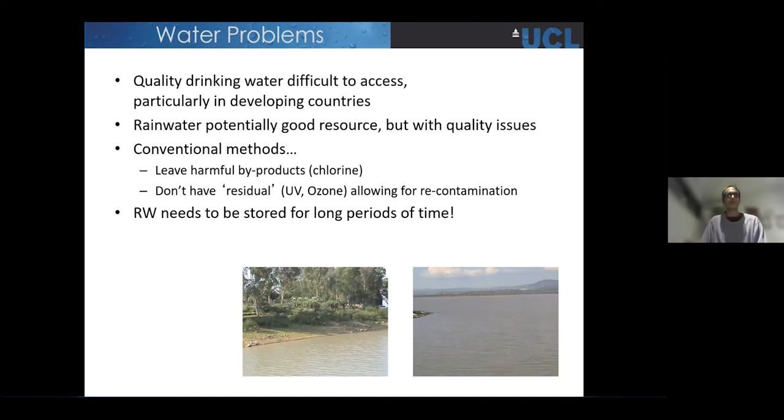and the issues around storage, which are quite critical because in many parts of the world, you only have rain 3-4 months a year, like some of the areas I worked in Mexico. And you need to be able to store that for the other 8 months. And that sounds easier said than done. How are you going to conserve it? Are those tanks going to be contaminated? How do you do it in a very cost-effective way to store all these huge amounts of water? So these are some of the problems and the challenges.

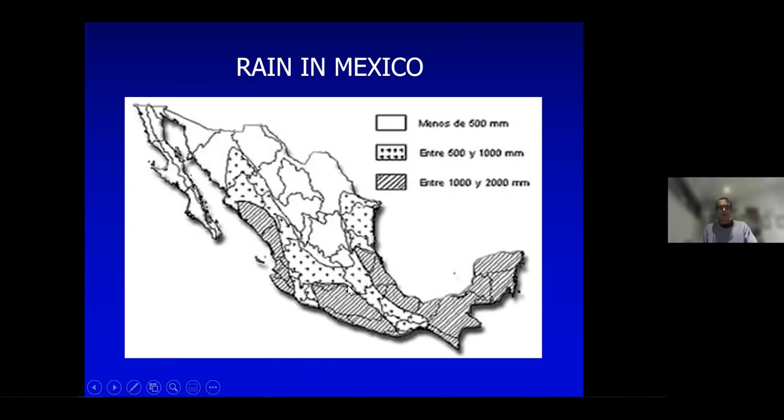So the inequalities in Mexico are not just economic, which are well known. It's a country with one of the highest economic inequalities in the world, probably, in terms of the gap between rich and poor, but they're also present in water. So we have very water poor areas and very water rich. And that's quite interesting because any project you do has to be completely different based on where you are. So I started all this in Mexico City, which is in between the temperate and the rainy zone.

Something that a lot of people don't know is that Mexico City, even though we associate it with a relatively dry place, actually receives more rain than London, for example, which shocks all my students here at the university, because we tend to think if you're in England, it rains all the time. But it's one thing raining all the time and another is to have storms. And so in Mexico, it's only a few months a year, but it's highly, highly concentrated. And in those few months, you'll probably get more rain than what we get year round with this sort of drizzle that's quite annoying that you get throughout most of the United Kingdom.

So let me share here some interesting slides. Mexico is a city that can be extremely dry. It's very, very water stressed. In fact, I won't go into it today, but I do have a paper. I'll share the publication link later about how water actually gets to Mexico City.

And that is actually an incredible feat of engineering. It travels 200, 300 kilometers away. It rises over 1,000 meters. So it goes all over from the lowlands all the way to this very, very high volcanic city. And then it supplies to the 20 to 30 million people who actually live here.

So we have to pay a very huge price to get water in, energy price, the cost of actually extracting the water from other regions and other states and so on. And yet, however, you can see this neighborhood, a nice, easy to pronounce name for all of you, Ixtapalapa in Mexico City. You can see when it rains, you can easily get floods, people actually moving around on boats.

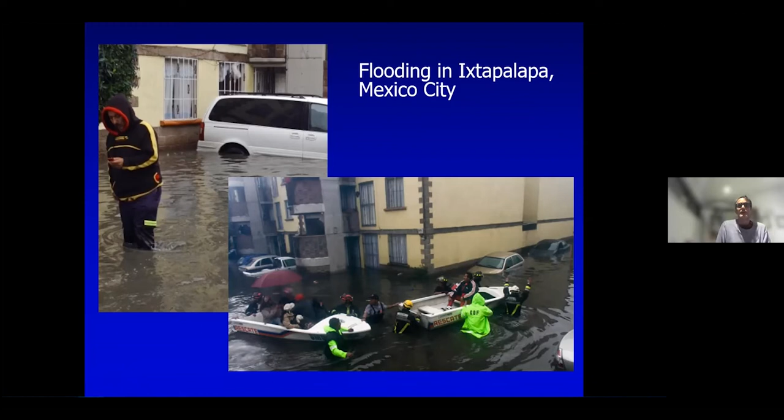They actually pay a lot more money per liter of water than what the wealthy people pay, who have tap water and they just get a meter and a bill. The people here will have to pay tons for a truck reaching them. So, of course, when I was working in Mexico City, I thought, well, this is a big disparity. I mean, if you think of the average consumption per capita, some parts of the world consume a lot more than others. USA, these statistics change.

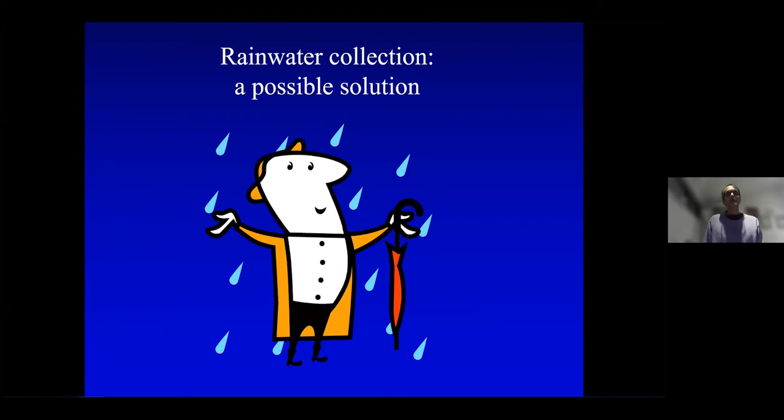So, of course, if we put 2 and 2 together, which is what I started doing with our NGO there, and it sounded obvious, but it actually wasn't that commonly done in the city, you can say, well, you have lots of water, and then you have a drought. So we could actually bring 2 and 2 together and actually start collecting some of that water. And that's how all my journey started, it was around 2002, 2003 with the first systems.

But the first thing to note is that we are not in any way original. We didn't reinvent the wheel just because our group decided to collect rainwater. It has been done in the Negev Desert, Petra, fantastic place in Jordan, which is actually in the desert. And they only have about 300 millimeters of rain a year in very concentrated bursts. But the Nabateans, I think it was, a culture who built Petra, they did these settling tanks and channels to actually bring all this water with stone chambers, actually very beautiful ways of storing.

The Romans did rainwater harvesting. The Mayas in Mexico had underground rock storage. In India, it was a very old practice as well. But sadly, in the 19th century, with the advent of hydraulic engineering, pumps, et cetera, a lot of that was actually forgotten because the trend was more to have big hydraulic works, big piping, big pumps, and so on, and kind of move away from this local, decentralized approach.

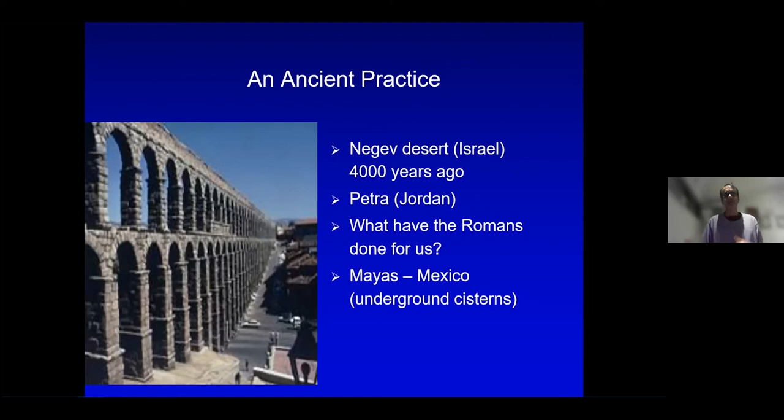So it is common to see lots of these cisterns abandoned. And in India, they had the famous tankas, which have only started to be revived by NGOs relatively recently, but a lot of them were actually neglected for many years. So we were thinking, well, this is an ancient practice. Can we bring it more into the modern world?

We see an example here from the 1920s, 30s. Some of you have been to the Park Güell in Barcelona, built by Antonio Gaudí, fantastic architect, of course. And this park was already very futuristic. All these columns in the classic Gaudí warped shape would actually have pipes inside, some of them were hollow, to bring the water and collect it in massive cisterns underneath the park, which was then used in the dry season to keep the whole park irrigated. It's still used. So an incredible example of how you can make rainwater beautiful and aesthetic as well.

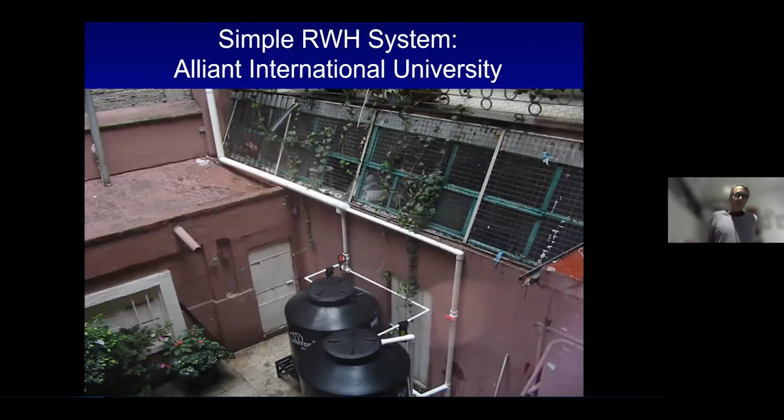So the first project I began was in the university where I was working, which was an American university with a campus in Mexico City. It was called Alliant International University. And basically, it was a very old building from the very early 20th century. Those of you from Mexico or who know the area, it's an era known as the Porfiriato, from a president called Porfirio Díaz, who was very inspired by French architecture. So lots of neighborhoods were built in the old French style, including this university.

The problem with the French style and with buildings in the early 20th century is there was no criteria about collecting rainwater. This was not on the agenda. So the sewage pipes running from toilets, etc., mix with the rain pipes. And that's very, very common. If you go to old buildings, everything is kind of mixed.

So we had to actually rescue, in a very old historically listed building, the rainwater pipes. So we had to go as high as we could, break the wall, try to see where the toilets and the kitchens or the sinks were connected to this big drainage pipe, and just rescue the rain that came from the roof, and then put in purification systems and so on. So that was our first system. It was quite a challenge.

We had lots of problems, but we learned a lot, and it was extensively covered by the media and the press, including Reuters. BBC did a program on it in 2004, which really impressed me a lot, because I thought this is the most silly, obvious thing in the world. We're just putting two tanks to bring the water from the roof down. But you would be surprised at how much resistance there was to it, how few people would do it.

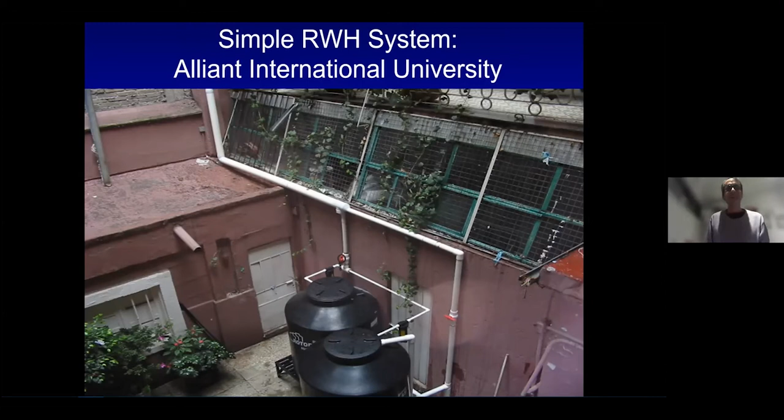And the excuses were all sorts of things, from water in Mexico City is contaminated because the air is polluted, rainwater is dirty, rainwater is wastewater. You don't drink that, you don't want to go near that. Because of course, when it rains, people see the streets flooding, which happens a lot in Mexico City, mixing with the sewage, and they just associate rain with very dirty water. The urban association is not this sort of fresh spring, it's a completely different perception, or it was. It's gradually changing, as we'll see.

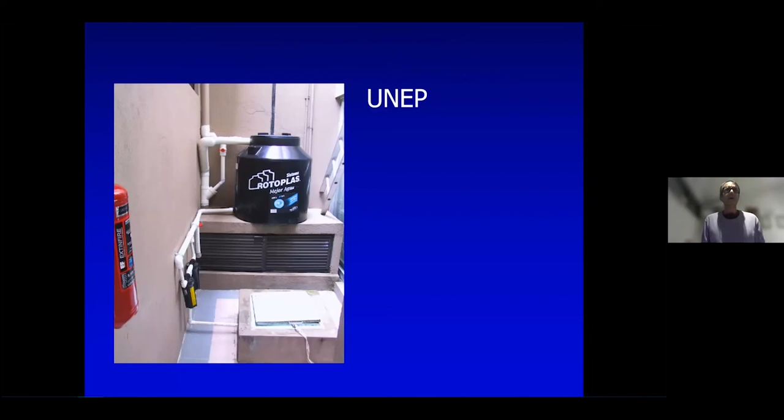So the success of this led us to build a new system in the United Nations Environment Programme, where I worked as an advisor and consultant for two years, managing water programs across the Caribbean and Latin America. The headquarters used to be in Mexico. So we did a nice system, and what you see there is actually a sand filter. So I started experimenting with old techniques like biosand filters.

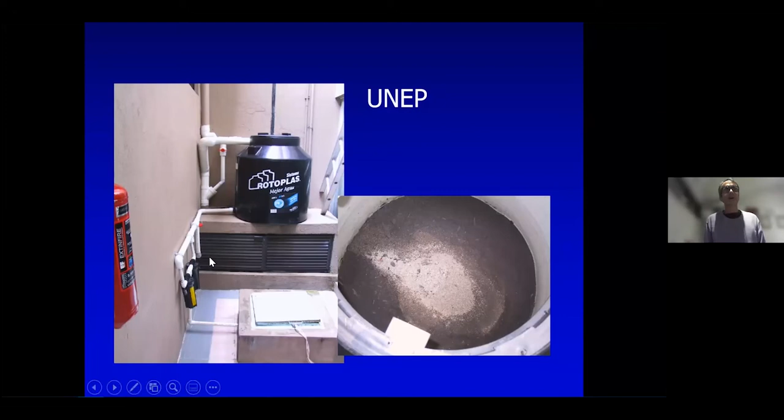Again, nothing new. We're just trying to combine different options. And we were using systems that already existed. Again, in old buildings it's very hard to build new things. So they already had a water cistern. Mexico City suffers from water shortage, so it's common that people will have a cistern anyway. So we just started learning how to purify, filter water, clean it up, and then mix it with rain.

That led me to do a massive project, in 2004, 2005 as well, with the Ministry of the Environment. That's their headquarters. In Spanish, it's called Semarnat. This was 500,000 liters a year. A big engineering challenge to do this. It's a building that has thousands of people working there. It's the Ministry of the Environment. So we used all the elevated roofs we possibly could.

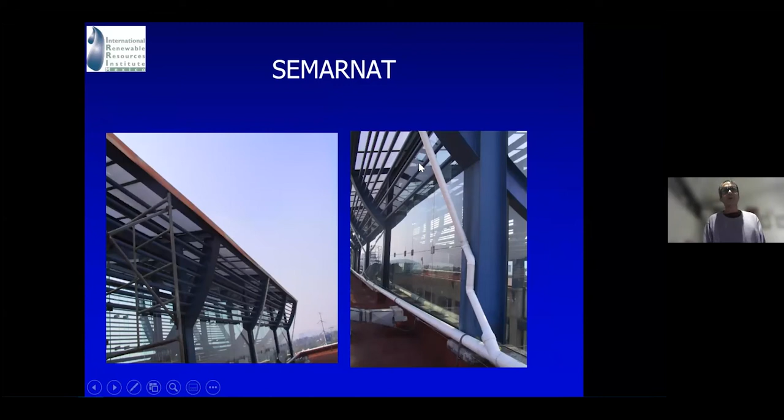And then an interesting design here was to combine with the existing cistern. Again, they had capacity for also about over 500,000 liters. So what we did is purify the water, state-of-the-art purification, UV, big retro washable carbon filters, particle, everything I could possibly imagine in the book of filtration. I threw it in there because this was a Ministry of the Environment, so they were obviously very concerned with the quality of the water.

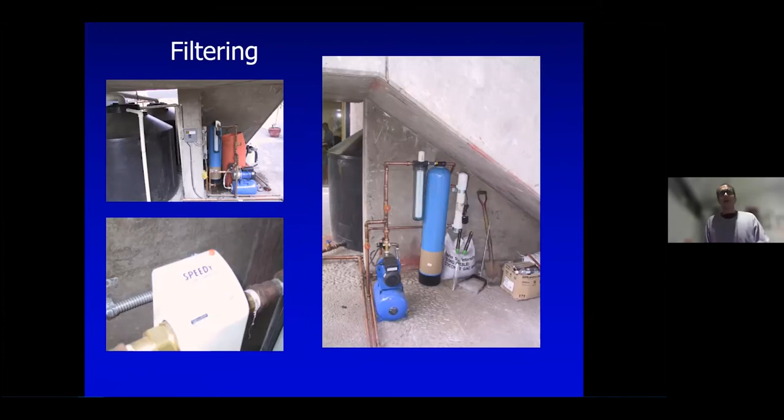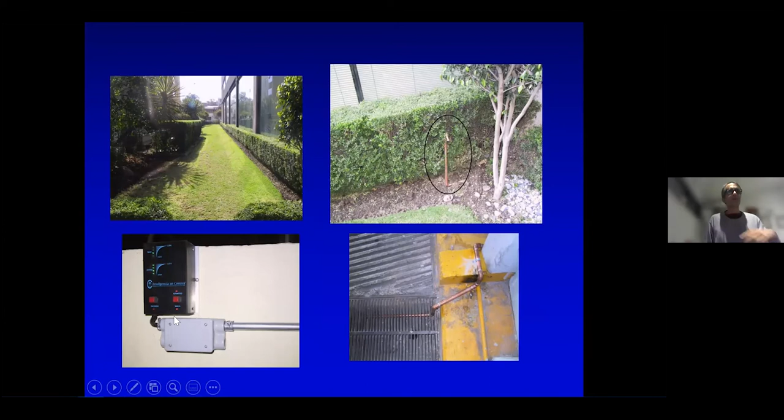And this clean water, we would then feed it into their cisterns right here. The not so clean water, because we could separate it, so the unfiltered, we use it for their gardens. They still have extensive areas. So I set up a couple of taps of just crude, unpurified rainwater. And then we had some electronic controls to know what was going in what direction, how full was each cistern, and so on. That's been a successful design.

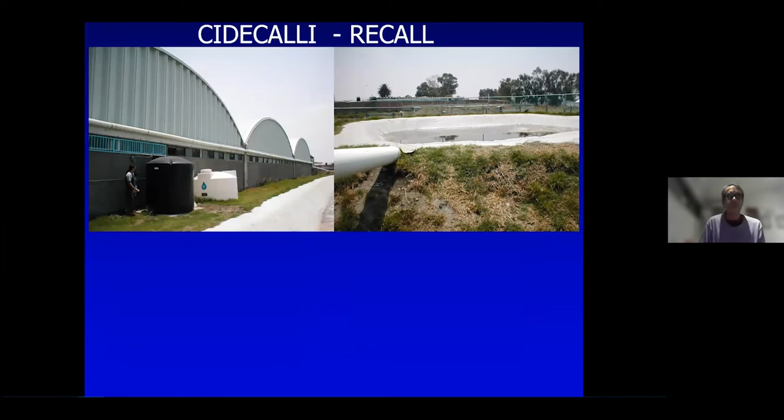This is not one of my projects, it was one that I joined up. It was a university in the outskirts of Mexico City, the postgraduate school. They had this idea of doing very, very large 1.5 million liter cisterns here with a plastic geomembrane, a brilliant way, which I then adapted to many of my future projects.

And then with them, we created something that was called, in Spanish, the acronym is the Network for Rainwater Harvesting. It doesn't really exist in that form or shape today. It's sort of evolved into different things, but it was a successful group. We had NGOs, we had the United Nations Environment Program, we had a couple of universities, suppliers, and it was a nice thing.

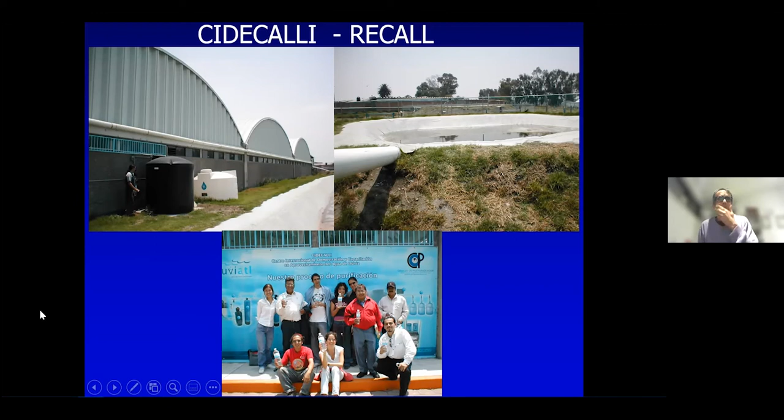So this particular group, they did a wonderful project, purify the rainwater. In this case, they used even more purification, reverse osmosis, you name it, and they bottled the rainwater and then sold it to compete with Coca-Cola, who still has a big monopoly over bottled water in many parts of the world, including Mexico. I wouldn't say exclusive monopoly, but I think they take over a huge portion of the market. So this was a cheaper water.

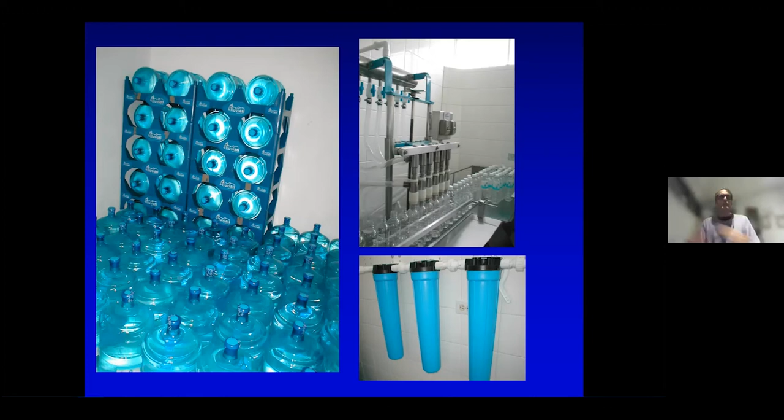It's very soft because rainwater, when you purify it, drinking it is lovely because it doesn't have as many minerals. So it's what you call soft water. Some of you will know the difference between hard, which is very mineralized water, lots of calcium, magnesium, and soft water. So this is very soft water. And then I started doing systems in homes as well. And people who shower with purified rainwater, they cannot go back to the other water because it's excellent for your hair. It doesn't clog the sinks and taps with lime because it's very soft water. So that has many advantages.

So here, again, I learned a lot from this postgraduate school that I showed you. The idea was you can actually build a cistern with this plastic membrane, which is quite cheap. Just compact the ground and dig a hole. And then on top, you can put a concrete layer or beam and tiles. There's a few techniques that we can do to just create a slab and cover this. But instead of having a whole bunch of concrete underneath, which is really expensive, it's like building a room underground, we just do this membrane.

So after that, I went on to do not just NGO work, because I had to make a living, right? So I started doing commercial projects. I did high-rise buildings with big developers. I did the system in the Walmart headquarters, you have to work with them all, don't you? Which was the main headquarters for Mexico. I don't know if they also control some other areas of Latin America. So their entire new headquarters, I did the full rainwater harvesting system and also advised them on other water saving. They were very keen to get the LEED certification, which is a sustainable building certificate.

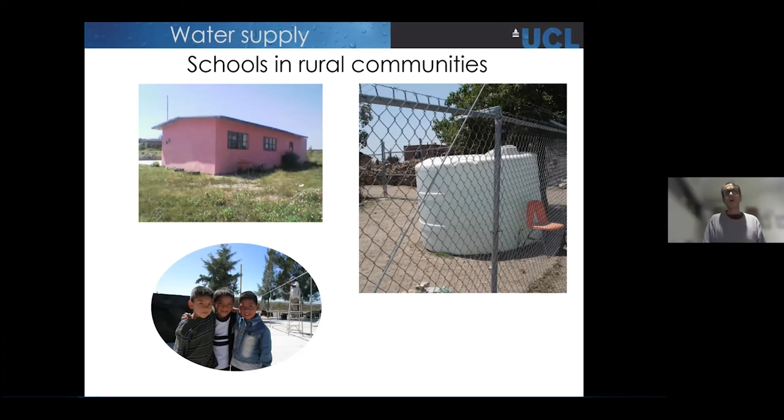So I was hired by the municipality, and we noticed that lots of the schools just did not have any potable water. There had to be a truck delivering water. And what they did have was some wells which are extremely contaminated. So we could see fluoride contamination. We could see arsenic in some of the wells, E. coli. The kids displayed an early disease called dental fluorosis, which happens when you drink water with too much fluoride from the wells, which then becomes a crippling disease for the bones.

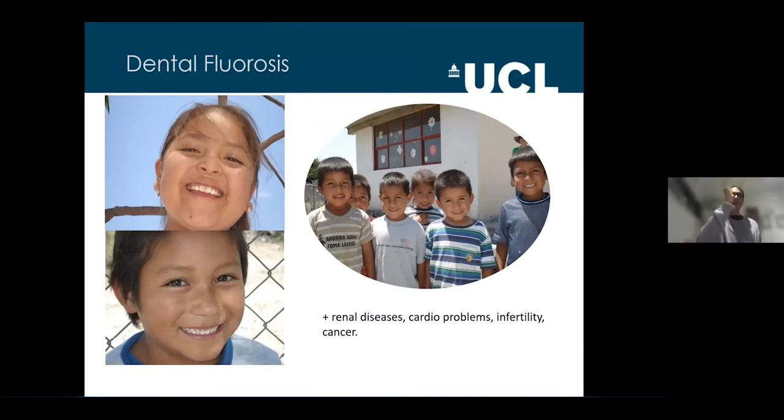They hired me to kind of tackle this problem. And they said, well, let's just collect rain and then purify rain and leave that well water for other uses, toilet flushing and maybe even hand washing, etc. And let's use clean rainwater for drinking. So the other way around of what most people think. And we started developing this sort of model for rural rainwater harvesting systems.

This is based on an NGO that kind of spun out from RECALL, from our first group that I mentioned. Very successful. You can look it up online, Isla Urbana. The director is actually a cousin of mine. It's all in the family.

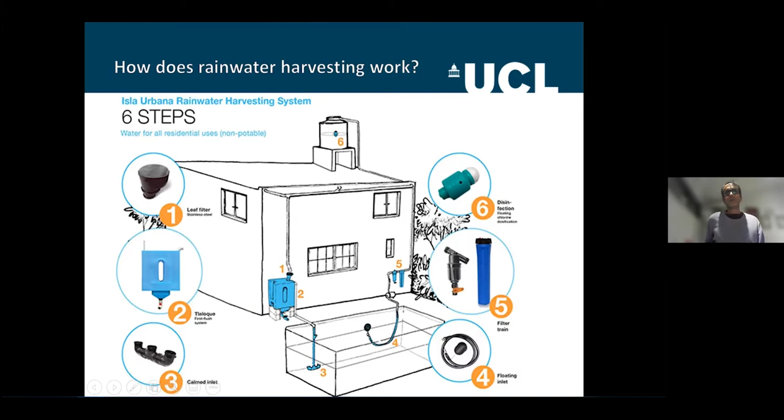So it's a very nice graph. You can see here all the elements that you would need to have in a rainwater system. So you have obviously the gutters. I'll show you some pictures. There's a first flush to get rid of the first impurities of the rain. Then you have your cisterns, purification, and so on. And this will change depending on what you want to do. And then I'll just show you some examples.

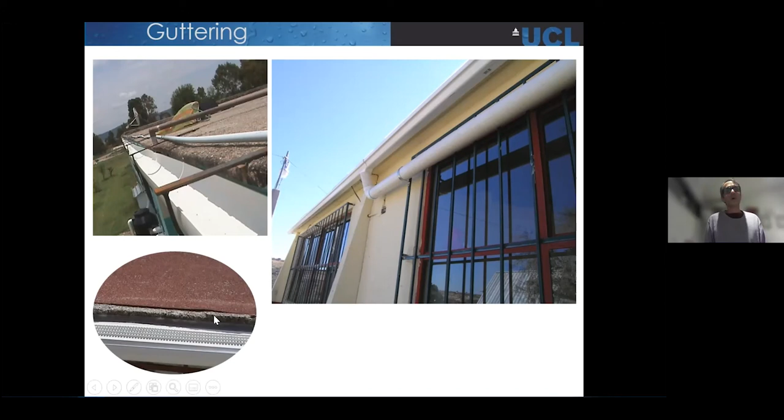So you can actually do very cheap guttering with just PVC pipes cut in half, or you can buy more sophisticated guttering like this with meshes for filters. The first projects I didn't put that mesh, and then we had a bird's nest here on the gutter, unbelievable. And it was just flushing down the whole thing and clogging everything. Or rocks, or all sorts of things. So it's important to take care of roofs when you're going to do this. Look into the uses people give. In Mexico, some people hang clothes on the roofs or live there. So you have to consider all of these things.

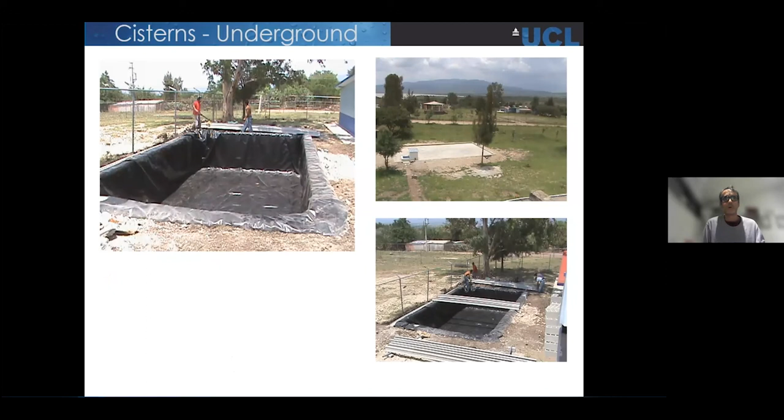We developed this technique that I mentioned about doing compacted square boxes with membrane, and then putting this technique, which is local in rural Mexico, beam and tiles. And then you could do what I'm showing you on the top right corner. So I did loads of schools and clinics with this technique.

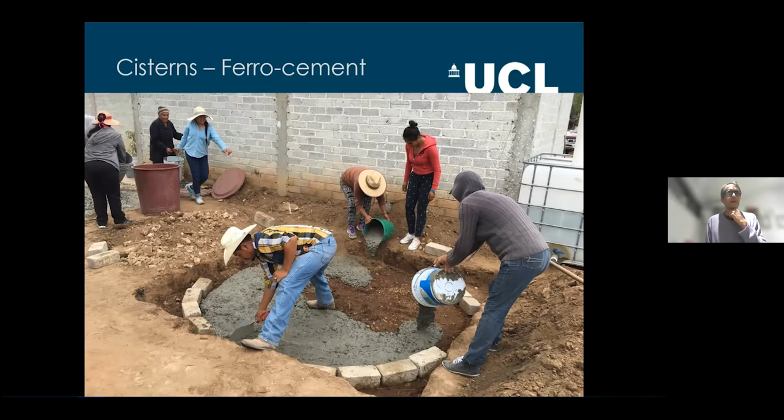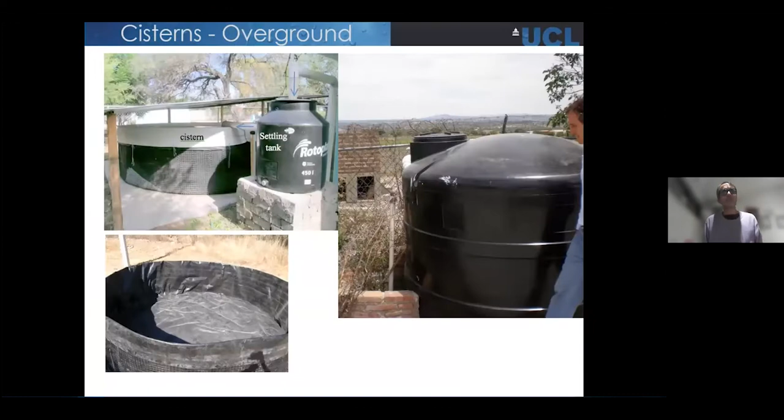Another well-known technique is ferrocement. So we work very closely. I'm actually on the board of directors of Caminos de Agua. It's an NGO in San Miguel, and they do these types of cisterns, which look like they're pencil shaped, and they can hold lots of water as well. They are more difficult to install, obviously, but they have advantages in that they can be done with local labor. So there's pros and cons, but it's just to give you an idea, there's a wide range of techniques.

So what did we do in terms of filtration? Part of my PhD was looking into this thing called silver ionization. So silver is kind of well known. People use it a lot in ceramic filters, colloidal silver, they call it, as a fantastic disinfectant. We developed another technique where you could actually release micro doses of silver into the water, which is actually a lot healthier than chlorine and has a lot fewer side effects.

And it's an excellent disinfectant. At the limits we use it, there's no known harmful side effects, and it also stays in the water. So remember the challenge we began this lecture with, we need to store the water for a long time. So the idea of having something that has a slight residual, which is not chlorine, because chlorine can create all sorts of problems, react with organic matter, form trihalomethanes and cancerous compounds.

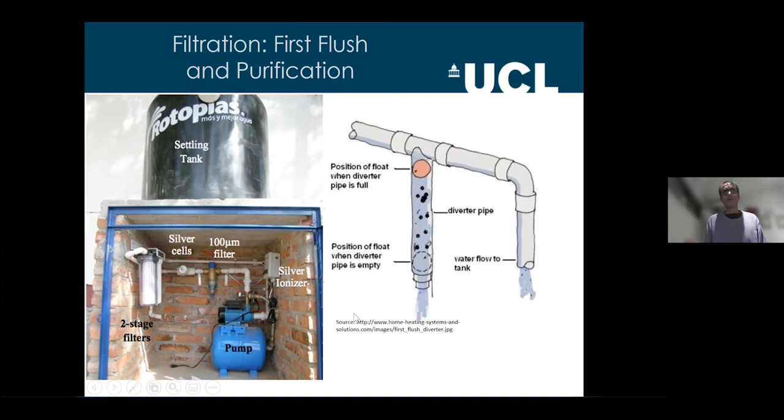We're trying to use this. You can still use chlorine and then filter it out. Here, use chlorine as a pre-treatment. It's another possibility. I work with these silver ionizers, and they were very, very effective. So this is some of the early projects, drinking fountains for the children in the various schools. That's a younger me there inaugurating a project.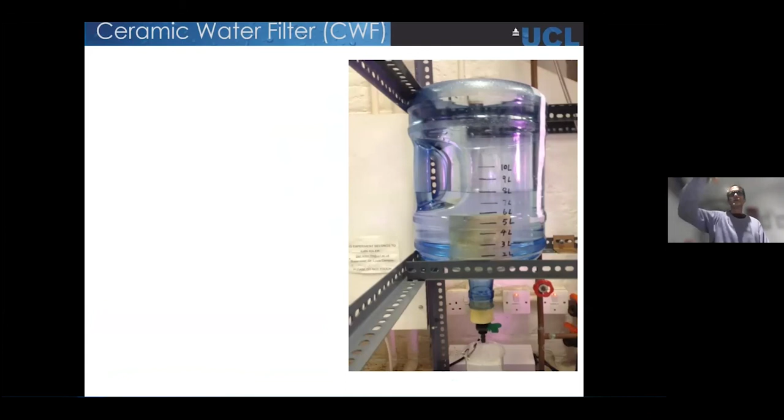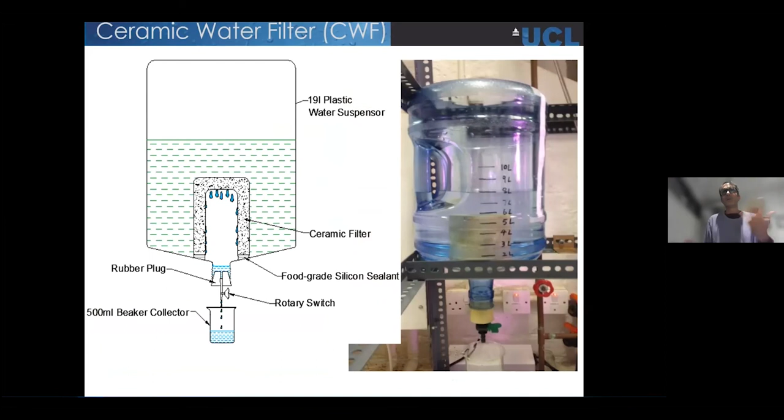We work with this NGO Caminos de Agua in very low-cost ceramic water filters. They're actually coated with silver, and they're ceramics, so they help filter 99.9% of bacteria. You can adapt them by using a conventional, super cheap 20-liter jug, put it upside down, put the ceramic filter element, and there you go. I did lots of lab tests on this as well in London, so we did some collaborative projects with them. Now they've evolved, they're a bit more sophisticated, but it's the same concept of a ceramic filter.

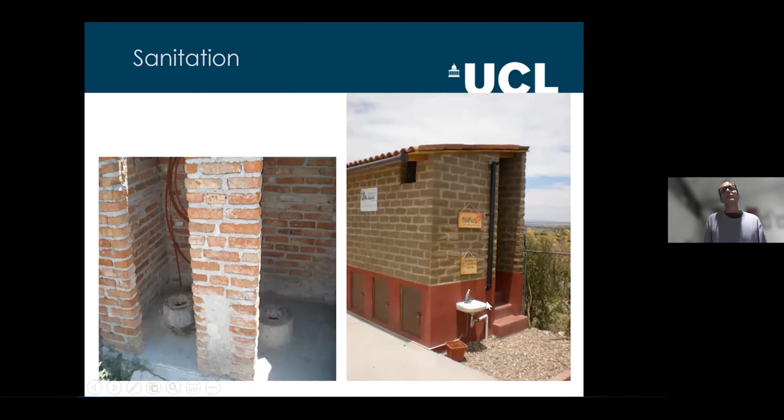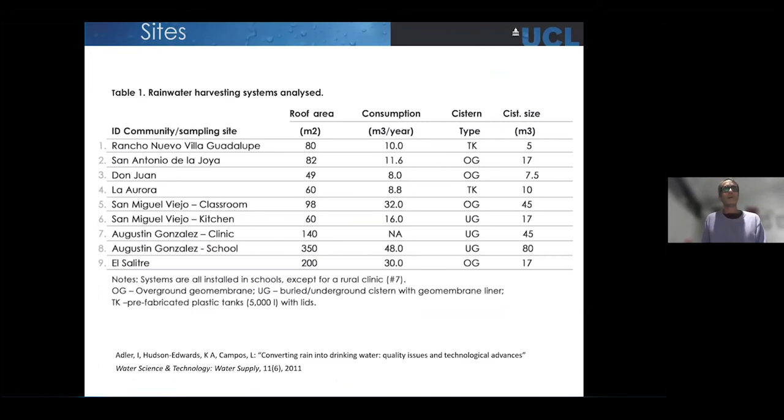In the same schools, we also work with hand washing, with dry toilets. This is toilets as they used to be, really disgusting latrines, and we did these nicely well-made dry toilets, also with the rainwater harvesting, which here was used straight for hand washing, because hand washing is crucial to eliminate lots of diseases, not least COVID, but also gastroenteritis, other diseases that kill a lot more people than COVID. So these are some of the communities that I used to work on in my PhD.

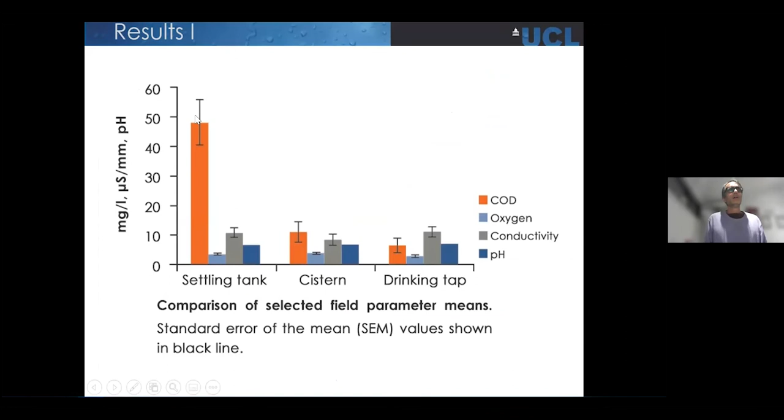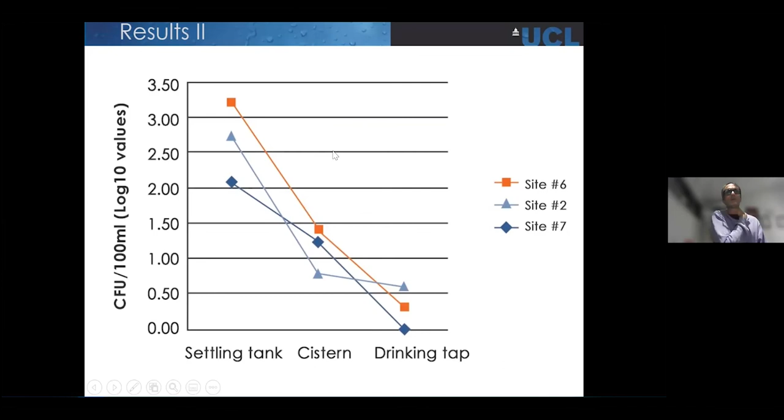So the idea was, well, how do we learn more about disinfection? So we looked at reducing various parameters. In this case, it's E. coli, for example. Settling tank, you have a very high contamination. That's the first water from the roof. By the time it gets to the cistern, you eliminated tons thanks to the settling tank. And then the final disinfection, the ions, whatever, will bring it down to within water quality standards.

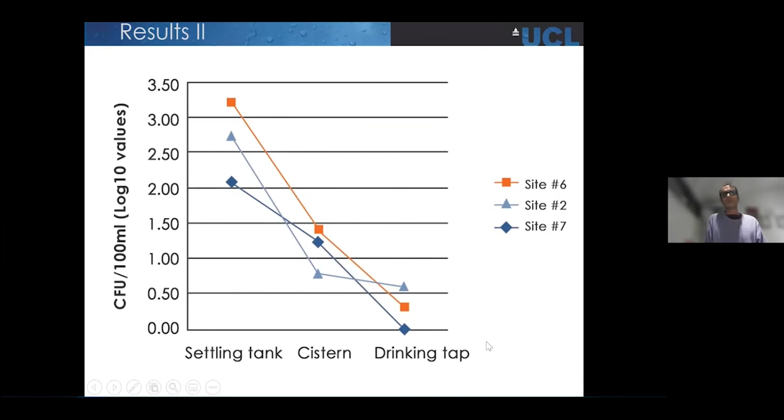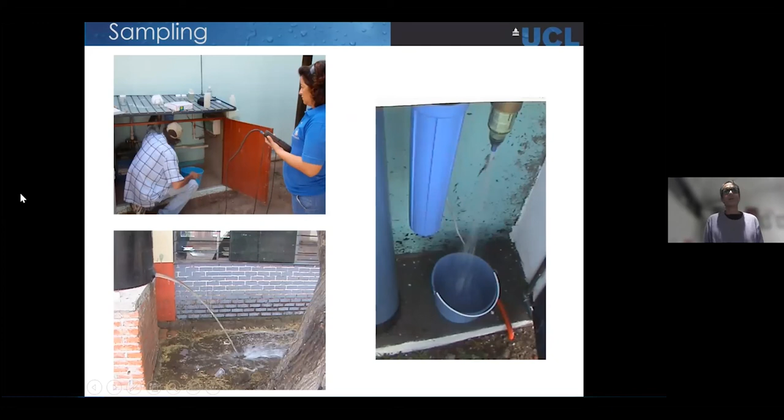So I did lots of field work, also beyond the PhD, working with the local environment authorities and water ministry. This is someone from the water authorities of San Miguel as well, and just doing all sorts of monitoring and sampling to actually understand this. Then we've done lots of research, I'm coming towards the end, at UCL, where we simulate and model this. A lot of people say, well, what research can you do in rain? You can do a lot.

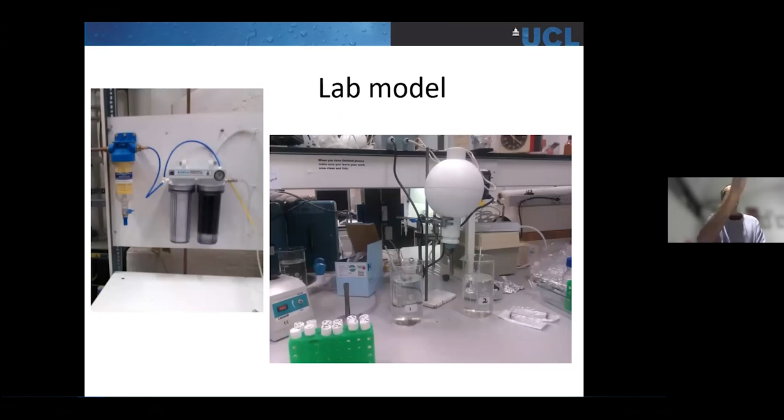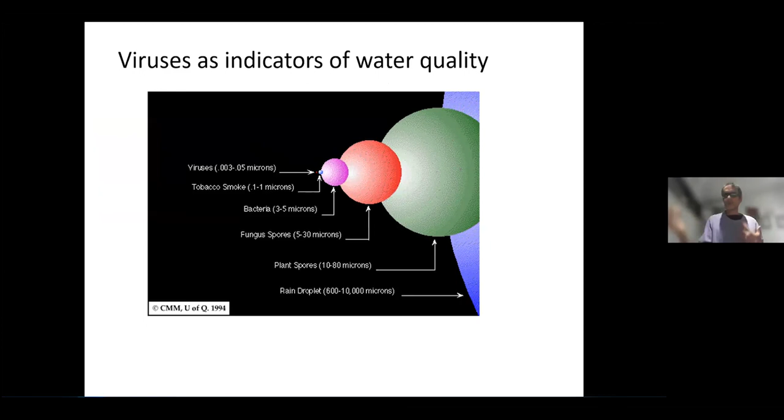So one interesting thing I did was actually simulate with viruses, because many of these filters that you buy off the shelf, carbon, are great for bacteria, but they're actually not great for viruses, which are very, very tiny. If you see here, a virus can swim right through a lot of conventional filters. So we looked into, again, silver, different disinfection and filtration techniques. And I used something called a bacteriophage, which is a viral indicator. Obviously, I was not going to get an actual real virus, which is super dangerous in lab tests.

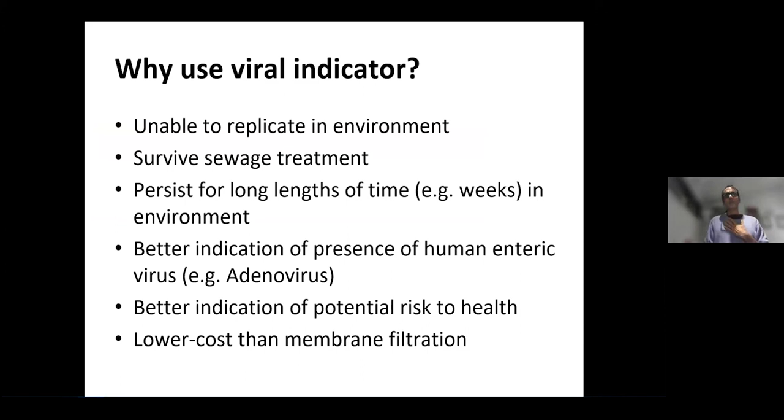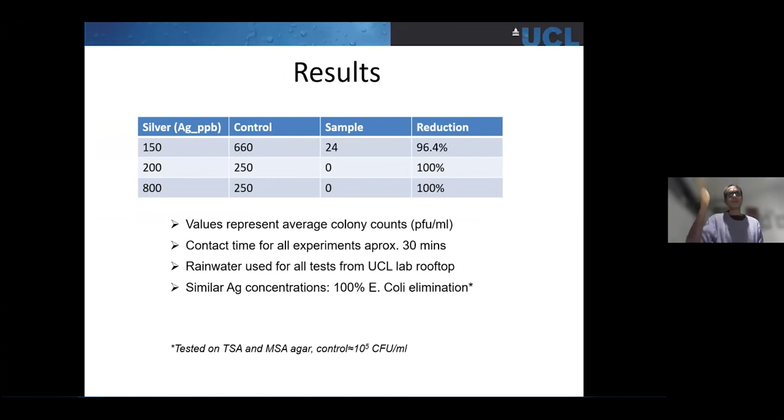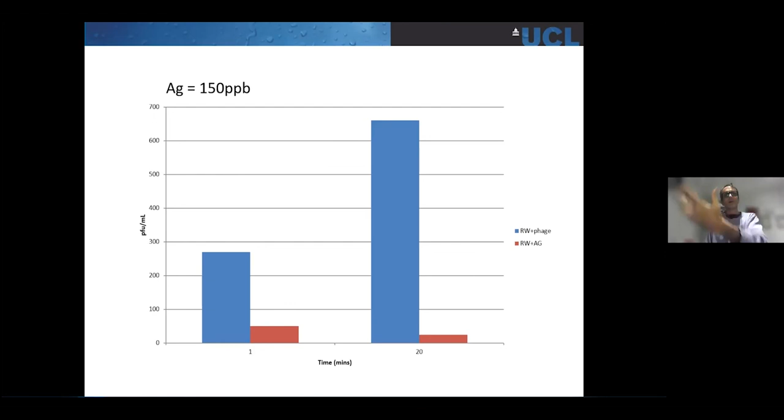So you have something called a proxy. They behave exactly like viruses, but they don't harm human beings. But they can help you simulate waterborne viruses, which create loads of problems as well. So we had some interesting results. A lot of that was published in a paper and presented at a conference in Sri Lanka, of all places. And we did learn that the conventional ceramic filters do remove bacteria, but not all of the viruses. So you do need to have that extra treatment, be it UV, be it silver or whatever, or even reverse osmosis, which is very fine filtration.

Some other research I've done, and I'm still kind of working on, this was also published, is on the life cycle analysis of rainwater harvesting. So this was done with one of my master's students and with a Mexican organization here, CAPSUS. And we picked lots of the buildings where I had done high-rise developments, and we looked at the embodied carbon, and that included to the detail, like the pipes, the concrete, the pumps, all that has an embodied carbon. But we save a lot of carbon because we don't need to pump water from 200 kilometers away, like I explained in the beginning. So it was like learning all the different ways of doing rainwater harvesting. Do you purify it all?

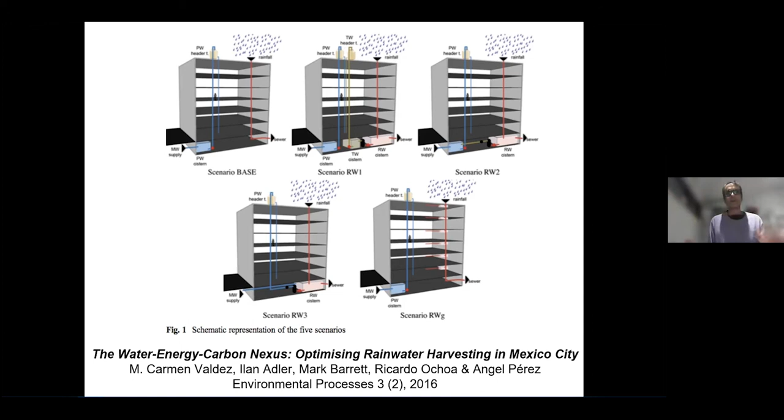Do you keep that separate? Do you just use it for toilets? And modeling that in very sophisticated life cycle analysis software to try to understand the different impacts that you have on carbon, et cetera, and which is better. So that was quite interesting.

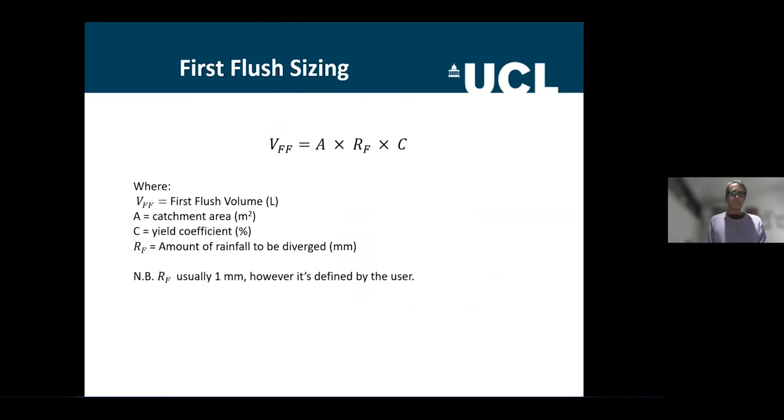And we looked at a lot of the classic equations. This will all be on the slides that people will use to design these rainwater systems. I'm not going to spend time on equations. I just have them there for the sake of reference.

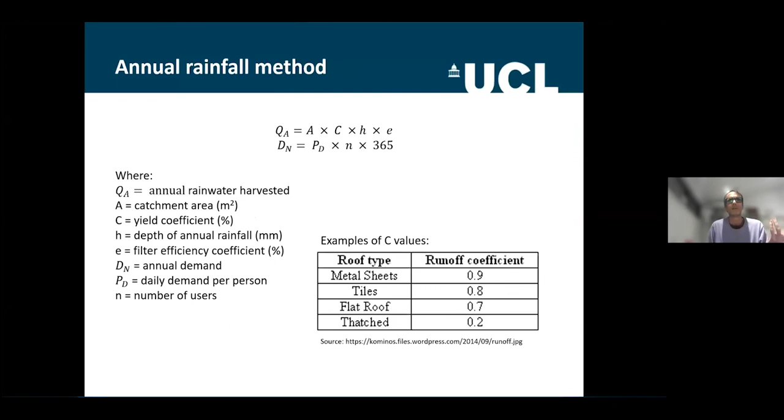So finally, some other work we've done in London is look at how do we understand these equations, which people use to design, which are very empirical. They're just based on some rough calculations that you do based on average rainfall. How do we actually have a real life shed, which we set up here, where we control every drop of water that falls, we collect it, and we have ultrasound sensors here that can actually tell us exactly how much water was actually collected, how much was evaporated, how much was lost.

Because this sounds a bit picky and detailed, but if you think that this can be multiplied over hundreds of thousands of buildings or bigger areas, then this is quite important. These losses are quite important. So we're trying to really understand, and we now move this to a new area, a real-time weather station, and then remote communication to understand and monitor the systems better.

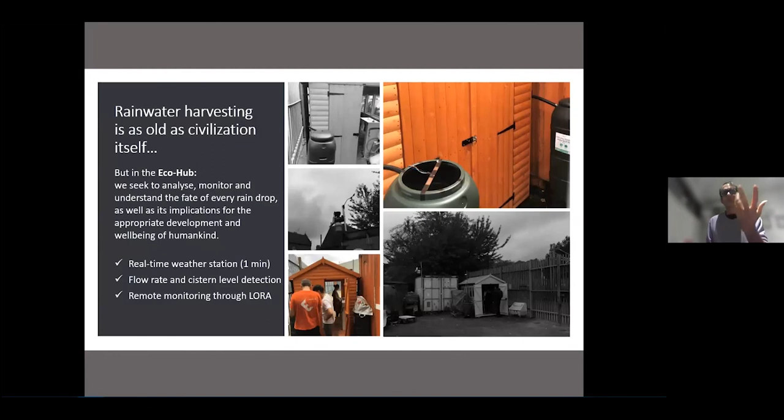That's the latest trend in rainwater harvesting, is try to actually monitor the systems better, because when they fail and they're very far away, you need to send someone, and maybe they won't report it. So having easy, quick indicators using all this great technology we have, Arduino and LoRa, which is a good data transmission protocol, mobile phones, etc., to try to get this data quickly and respond a lot better.

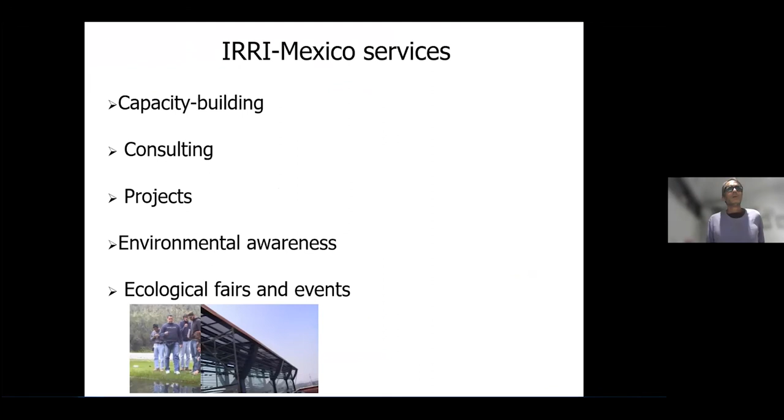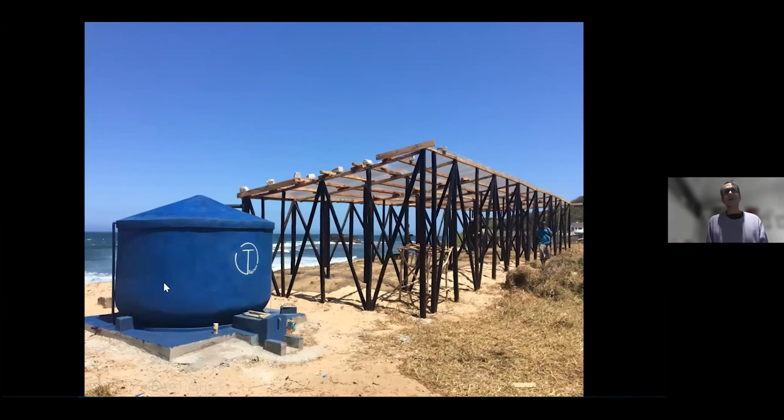This is a beautiful project. I'm very honored to sit on the advisory board of this organization in Madagascar, Tatirano Social Enterprises. It's likely I will be going there next year. We're preparing a few projects with them. So you can see here, right next to the seaside, a simple structure built just to collect rain and just falling right in here in a nice ferrocement tank.

Again, work in schools, extremely impoverished areas with droughts, with hunger at the moment, but trying to collect all the water that does fall, because when it rains, it pours. And this group is also very focused on aesthetics, like how do you do these systems that look nice? And as you can see, murals and so on, because it's not just putting a bunch of pipes. It's also how do you make people engage with it, like the children here, relate to it more.

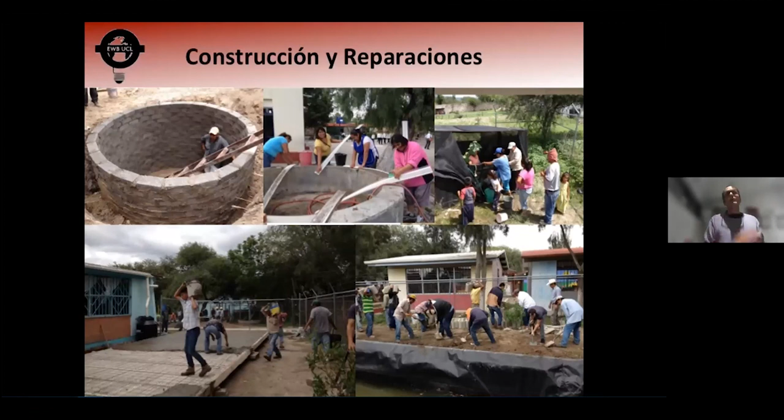We worked a lot with Caminos de Agua, who has taken over all our projects there in this area, with Engineers Without Borders. So we had several years of sending volunteers, working with the communities, doing maintenance, doing upgrading, doing research, building new tanks and so on. As you can see here, the pumps, the filters, the silver ionizers, etc. And overall just working to upgrade all of these systems.

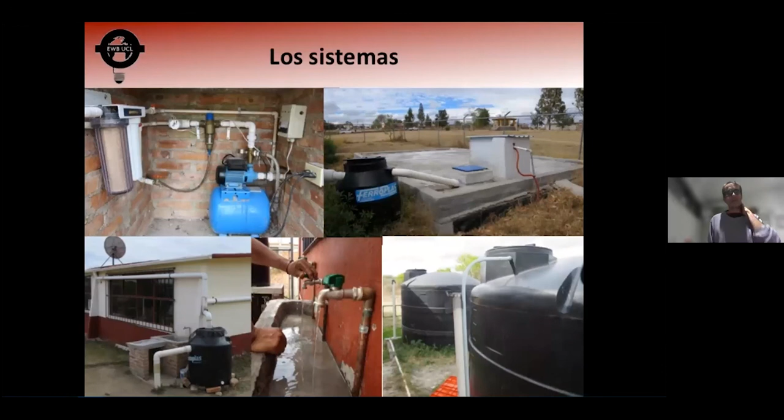This other group, Isla Urbana, has done very ambitious programs in the city now. They've installed thousands of domestic rainwater systems, and slowly it's getting there, but still, I would say all of that maybe covers less than 1% of the potential of that city. So with all that, I'm going to end it right here and open for questions.